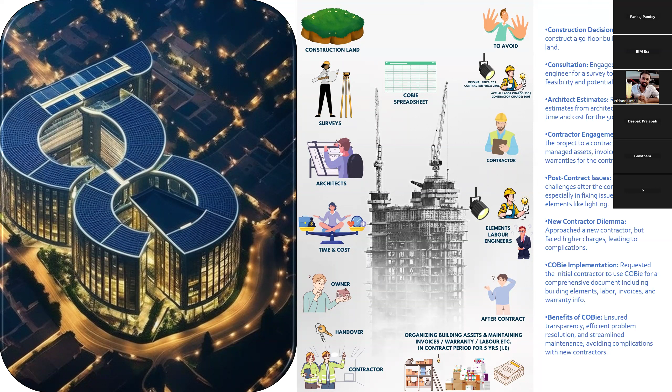What was that? Who is that? Can you please mute? Brother, you must have an option. Why is not Pankaj there? Yeah, Pankaj, yeah. Oh, who is that? It was Pankaj. Okay, I think it's okay now. Hmm, Pankaj. Okay, cool. No, I have an option for you to do that. Thank you.

Okay, so actually we are getting some sort of inquiries on working for COBie projects. So actually we are looking for a team. They are looking for a team. So who can help us with some sort of freelancing kind of stuff.

We generally conduct this kind of COBie training once in a quarter, around every three months, or sometimes it's not regular. The training which we generally take is Dynamo, API and C# regarding creation. So it's purely a BIM, I mean BIM Era is an automation company. So not only that, we are upskilling every BIM person into different sectors. We do train on COBie project, which is really helpful for every BIM person. At the same time, AR is just going to be a boom in coming days.

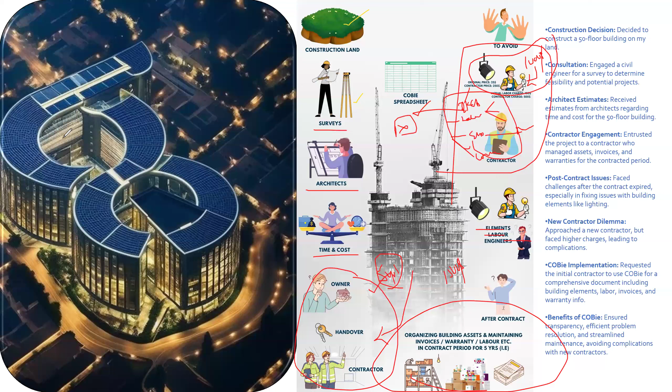So is this concept clear? Is this concept clear, everyone? Is this concept clear so far? Come on, you can text in the chat box.

Is this concept clear? Okay, good.

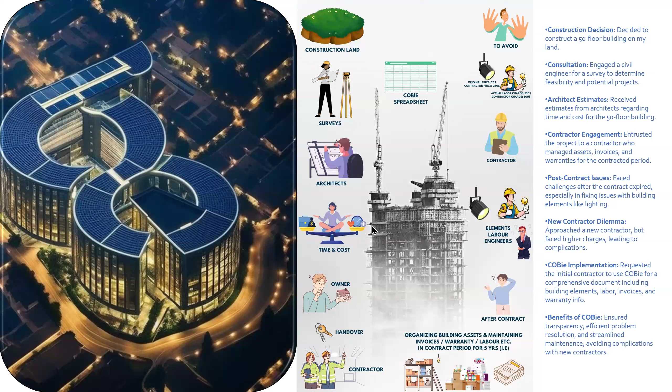So now when it comes to practical implementation, there are two things here. One is BIM and the second is non-BIM. First is BIM and second is non. So what is BIM and non-BIM?

BIM information, actually, when we model or design or build in 3D, the information will be pulled from Revit itself. That's called BIM.

And what do you mean by non-BIM? For example, when I purchase a transformer, they'll just give me a manual with warranty information, insurance information, and every single detail when I purchase this. There's a 5 year contract, maybe 5 years maintenance. So if something goes wrong, I don't want to pay additional. So every piece of information will be stored somewhere from a document.

It's purely data entry work. There's a dedicated team hired for this. That's the reason it's purely data entry. If you check freelancer.com, upwork.com, fiverr.com, you'll find people who work as data entry operators. They'll give some documents and give you a task to fill. Non-BIM data is purely from the documents.

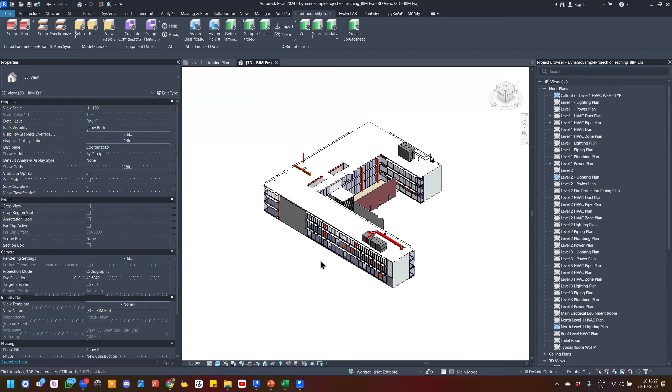You can't pull this information from the Revit model. For example, when I click on a lighting fixture here, I don't have any information in my model at all. I don't see anything like who is the manufacturer. I can't extract it from the model either, because to extract it I'd have to pull from the parameter and export into a schedule in Excel. But I don't have such information here.

So now the non-BIM process comes in. I'll open that particular lighting fixture. What is this? This is a pendant light. So I'll go through all the documents for pendant lights, and using the manual I'll pick it out and say okay, this is from manufacturer IKEA, and the model number is something like PL01, some random number.

And where can I buy this? You shouldn't fill it in on your own, it's from IKEA, IKEA.com, it will be there somewhere in the manual. So you have to fill it manually as IKEA.com, under devices, some random URL actually, like devices/lights/blah blah blah. So this URL information again.

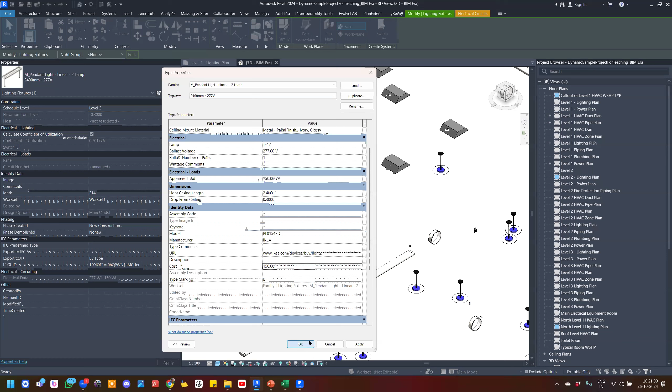So type mark, every single piece of information - but we don't fill all this information in the Revit element parameters, no. Then where do you fill it? I don't want to fill this here, okay, I just fill it here.

So can I export this into a COBie spreadsheet? No, no, okay, you can't - it will not be exported into a COBie spreadsheet.

But actually, how does a COBie spreadsheet really look like? Most people don't know how it actually looks. Let me show you a sample.

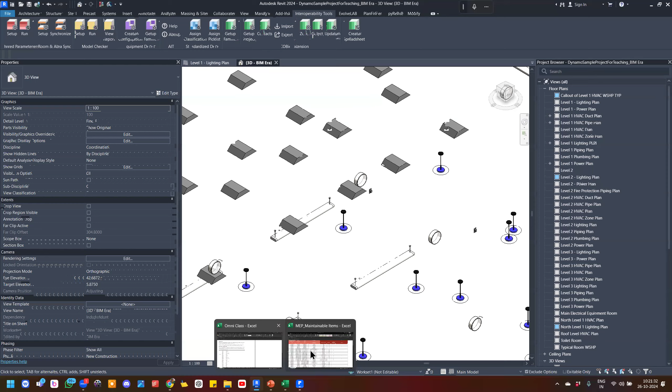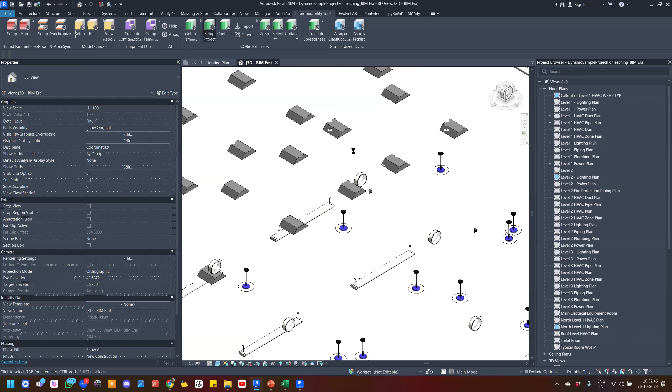Now in the COBie extension we have an option called setup project. You don't have this unless you install that application. So when I go to setup project, now I'm ready to create a project.

There are some tabs - I can set up general stuff related to rooms or spaces information, type information, component information, and system-related information and attributes. I mean parameters, but nothing to confuse - attributes are nothing but parameters. In automation we'd call them variables, here we call them attributes.

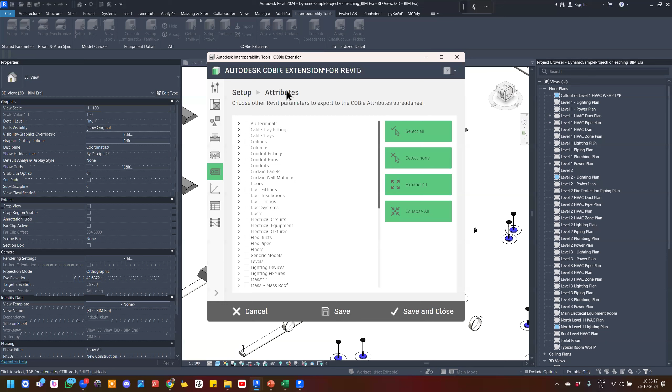So, coordinate points of every single edge, and the schedules. Now the parameter mapping.

If I have some sort of data in a Revit parameter, how do I link it with the COBie parameter? It's mapping, purely mapping - you can see the logo as well. See, you have a mapping from one project to another - these are like Revit parameters and these are like COBie parameters.

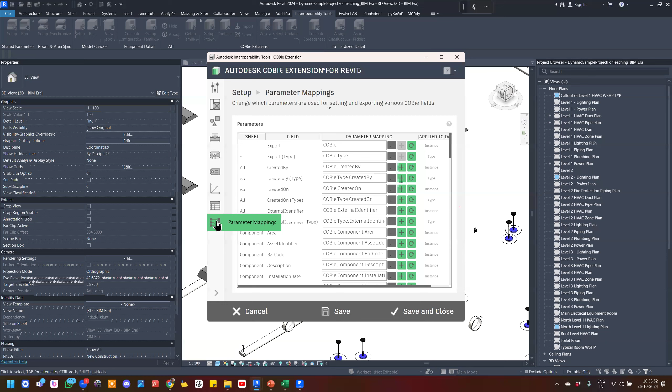So I want this information to be exported into this. This data from here, this data from here. Simple as that. But I don't want to make any changes now since it'll take a lot of time to explain every single tab. So just simply without setting anything, I'll click save and close. Now let it do its work.

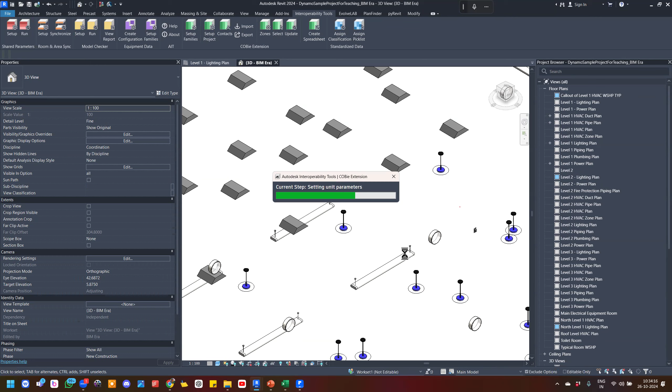And I can see some other sheets which are added in this. In the same plans we have some schedules. This is the COBie component, the COBie component for Windows. These are the schedules which are created by themselves. Let me close it.

So when I click on the same element, I see some additional COBie parameters. You see this now? COBie component area, asset identifier, barcode, description, installation date, when it is installed. So what is the length?

There is no point of adding length here. I mean, say it's 1.2 meters or 1 meter or something, you can indicate here. Component.name, serial number, space where it is exactly, tag number, if you want to add any, if there is any tag assigned to it.

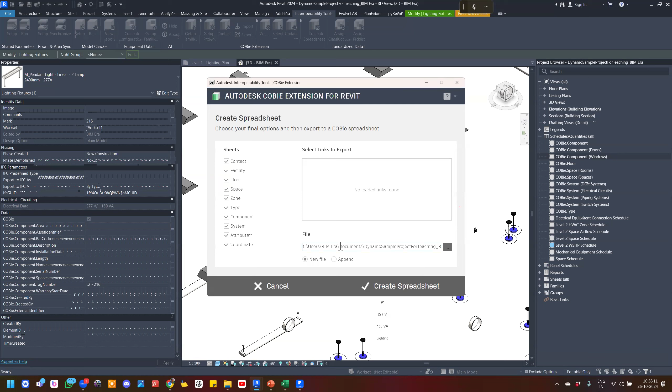So when I'm saying, please create a new file, I'll just say create a spreadsheet. Now it is asking me which one you want me to follow. I'll try UK.

Before this, there is another set of processes. You have to assign classifications and you have to assign a pick list. There's a lot, you'll learn this also during the training. I'll just open file, spreadsheet. There's no need to download any sample.

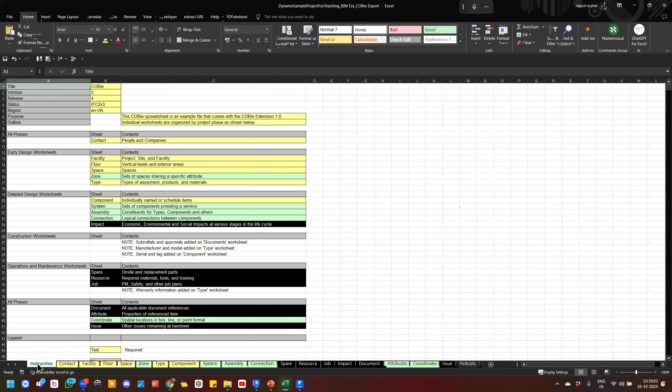Simple, see, in just a minute, in just one click, we created the COBie parameters. In one click, we created the COBie sheet. So now the real headache: how to see the data. See, every column, every sheet, every row is empty, ready to accept the data which you are going to fill. Now the challenge is, what for Rajesh, what is this parameter?

Okay, let me close this. Let's keep this aside.

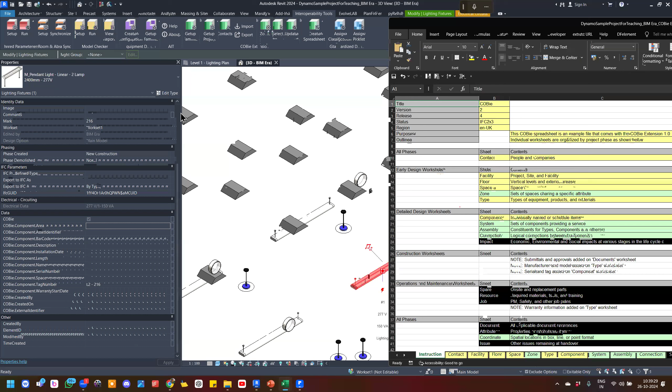Okay, if I fill COBie.component area, it's clearly saying that in the COBie spreadsheet, in this Excel document, there is a component sheet. So it's clearly saying there's a component. Where is it? It's here. Perfect, so now I'm in the component sheet in the area.

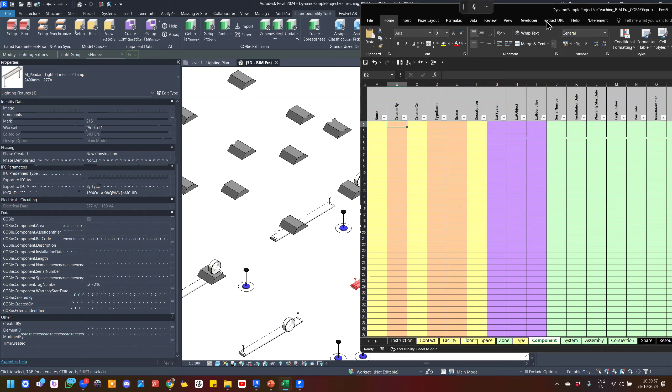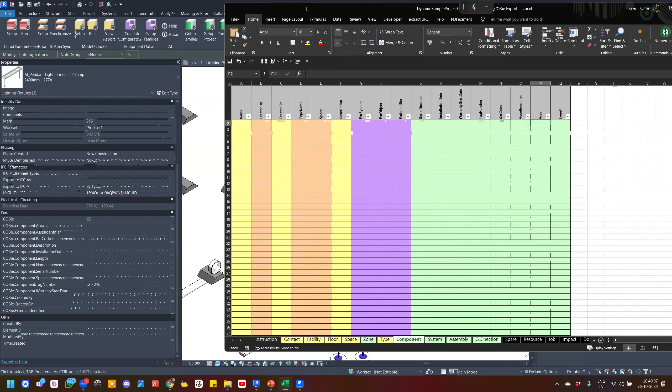I hope this is clear. Is this clear, everyone? Yes. Is this clear, everyone? So what is this? Is this requesting to record their computer? No. Okay, so is this clear?

So it's very simple. Component.asset identifier. In component, where is asset identifier here? If you fill the information here, it will come and sit in this column. Simple. If you are adding more elements, more data - simple, nothing else. It's very simple.

COBie component is fine. So COBie created by - what is this created by? I'll just go and check. Created by - COBie created by, so this is an orange color. As my previous statement, orange color columns don't need to be filled by yourself, it will automatically take in. So how will it take it in - it will take it from the contact sheet.

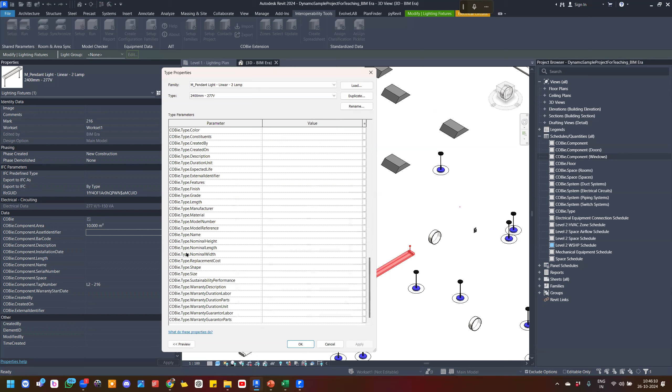I see the component here. So if I just click on edit type, I see COBie type spread, only type. So I see only component and type. What about the zone? What about the space? What about the floor? They are hidden in some area.

You have to activate those. So once you activate it, you can see, for example, manage tab, it brought information. We don't know some parameters were there. So coded facility, so facility sheet will be here again. So how about the contact?

Where is contact? So to create all this, you have to understand the complete extension from scratch till the end. So when I just click on the Setup Project, it will ask me to follow some standards.

If you're in the UK, so I set UK. And what is the units? I follow like foot, so area in square foot and volume cubic feet, and currency, it's USD. Okay, or else like I'll say AUD, something, whatever.

Okay, USD. I mean if you're looking for India, INR. So what do you want me to follow exactly? With element ID, GUID, or mapped parameter. So what is this identification?

So from the Excel, the modeler can get the direct information out there, by showing the sample project which involved before.

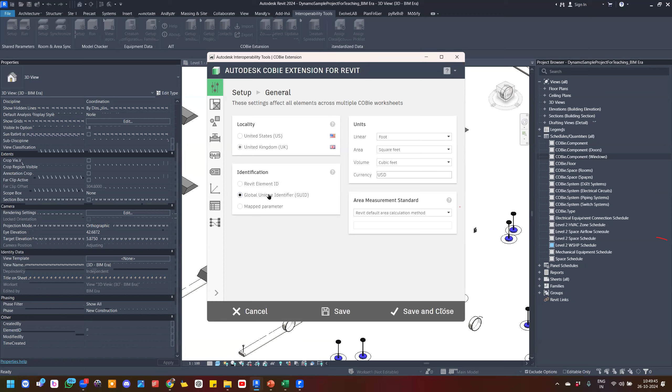So we have some set of standards we did for how we copy. If this is a default GUID, but instead of this external identifier, I'm a BIM user, so obviously I need the element ID of this particular electrical equipment, panel board, which is in level one. So I copy the element ID.

I copy this element ID for Excel and I use manage, select by ID. I'll find the element, it's very simple. But why is this a GUID? If an IFC application should talk to another IFC application, they don't follow element IDs, they follow the GUIDs. So this purple color data, these are actually talking to a different application.

IFC to IFC, this is IFC building element proxy. So this is a GUID which can directly talk to another application.

So in the COBie spreadsheet, if you're going to play with 7D facility management, under 7D or in the facility management, there must be a column, there must be some information. So it's clearly written what kind of area measurement standards to be used. So this is a BIM manager's role, to enter whether the company follows these COBie standards or not. Still, the BIM manager has to mention it in the BEP.

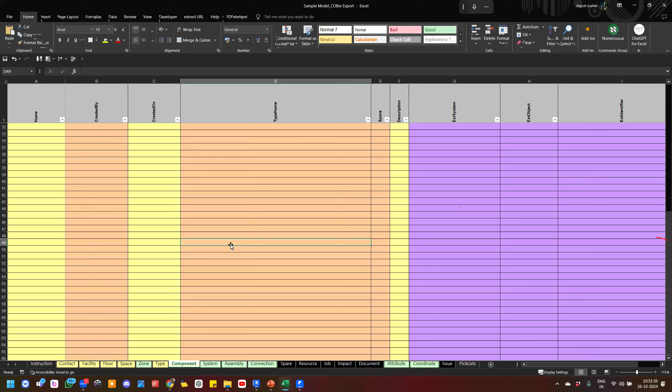For example, what is the motto behind why should I follow all this? Uniqueness. For example, there is an element in a different level and in a different zone, in a different building. I have three buildings.

Okay let's say tower, I have a different tower. Okay, in the tower, in the zone, in a different level. Okay, in a different area like room or whatever. So the number of it. Now if you separate all this for an object, I have light.

I have a lighting fixture here. So which tower is it? If I have five towers, tower four, you shouldn't type like tower four here, you shouldn't type tower four here. Let me show you how it actually works with the help of ChatGPT. Okay, this is something crazy, but stay.

I'll ask... I have created some for this. Okay, act as a COBie expert.

COBie expert. Can you please create a three digit code for the below standards? Just a minute, let me wait for some time. Sorry, I have some throat issue. Okay, so below standards, I'll mention everything here.

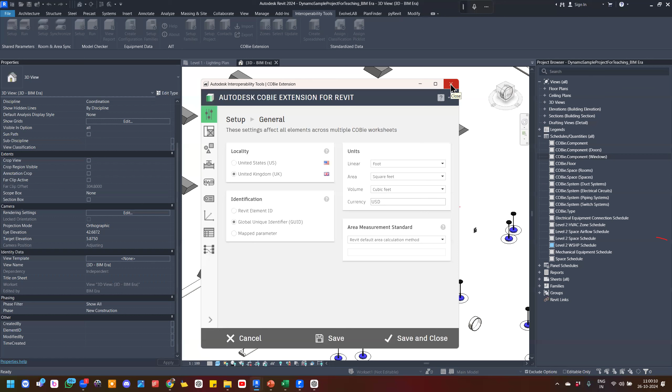Okay, so you can use that - there are some automation tools you can use, like Dynamo. You can use the spreadsheet, get this information from here, and copy paste into the Revit elements. That is possible with the help of Dynamo, but not within COBie itself. Okay cool, so I hope you guys understand what COBie is and everything.

In our training, we are going to learn how you maintain spaces. If you pick a room here, it returns a different result. Space gives you a different result, like assemblies. So what do you want me to follow? I'm an architect working on an architecture model. So should I set all the objects for room, for spaces?

If Civil 3D supports the COBie extension, yes, you can do it.

A space not created means, while doing this, then you have to create a space. If there is no such space created, it won't take it - it's purely pulling the information which it has. If there is no such information, it's very hard to fill. So you have to create the spaces and then try again. Is this clear?

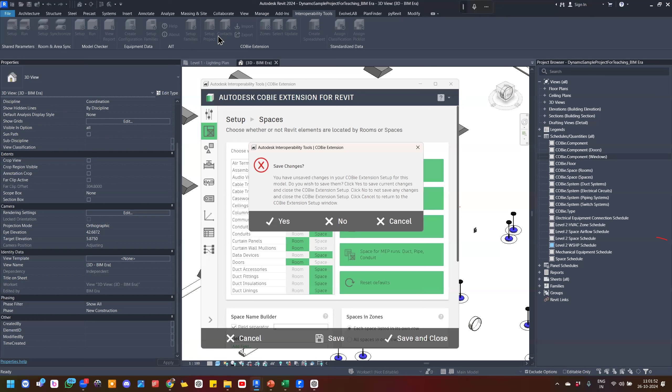For that, we have a set of families. If there are any families, from day one you want to play with the COBie parameters. So you can use this option to add the COBie parameters to the families, and then you can load into it.

Most companies are not doing it because this generally happens mostly in the as-built stage. When you're working in the modeling part, parallelly, no one will fill it - there will be a lot of confusion. So in most cases, you are going to work on a COBie project on the as-built model. No worries, you don't need to bother about this.

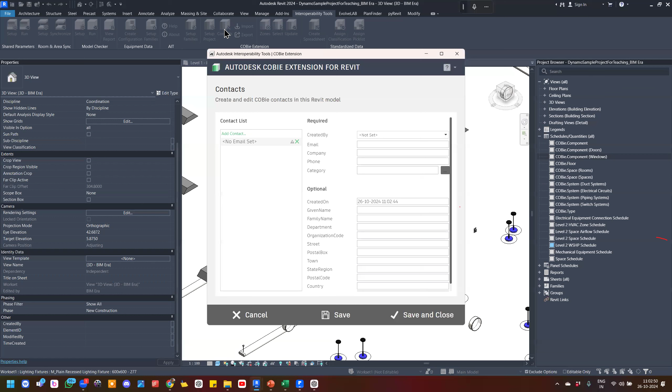And the contacts - who are the owners, who are the leads. If you're an engineer, an architect, a director, or a labor, every person's information will be stored here. If you store it, it will be in the spreadsheet somewhere.

So if you create zones, it will create as zones. Like, no, I don't want to preview a generation for this model - I can say something here. Let it create, it'll take 10 to 15 seconds.

In a building, you have to specify very clearly how many zones you have - it can't do it by itself. So you have to take this information from a manager or coordinator: how many zones we have, what are the zone names, and the area of each. So if this is A zone, this is B zone, and this is C zone, you have to specify it clearly.

How will COBie work on a consultant model? After the consultant, we generally go to the contractor where we work on it. In the consultant model, meaning it's in the early stage, if the client is expecting it in the early stage, it's the same process. There is no two different process for consultant and contractor - it's the same process we generally follow.

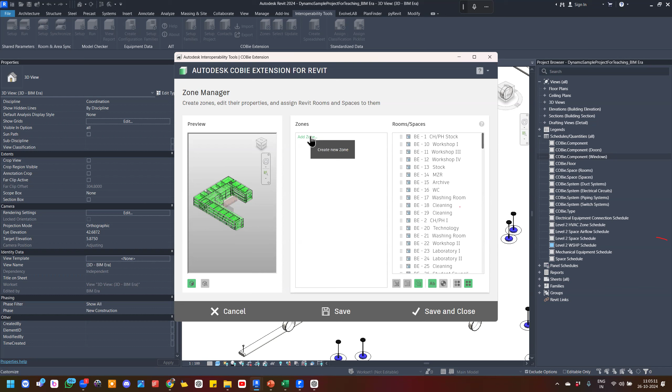Good. If no zone is available in the model, you have to create the zones, Amir. That's what I'm telling you - you have to create a zone. That is the reason you have zones. You have to create a zone.

Assign classification - again, this is very important before you start a project. When I just click on Assign, we don't have anything. See, we're about to finish the COBie, we're done with everything, so this is the last option. It's asking, the database is not loaded. Can you please, if you want me to load, I say yes.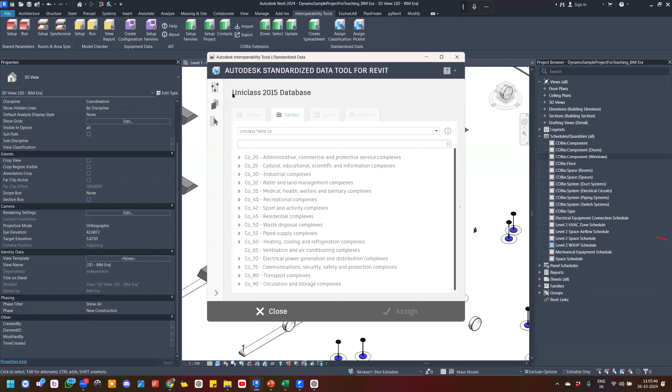Click here to load - now it is taking UniClass. My last project which I worked on, it is a UniClass. But if I want to go with the OmniClass, click here to load.

Omni class. Okay, so what are the standards we have?

If I wish to go with the Omni class, I'll click Omni. If the client is asking for Uni class, just click that. Then see, if you see the icon, Omni class turn it off, Uni class turn it off, Uni format and master format. It keeps on changing, the icons will keep on changing. So the information will be given by the client.

If the client doesn't have any instruction, I do suggest you go with the Omni class in the early stage. It will be very clear and easy to understand because there is nothing different between Uniclass, Omniclass and master format. It's the same, but we have to see our convenience until you have become expert in our tool, you have to follow the easiest process.

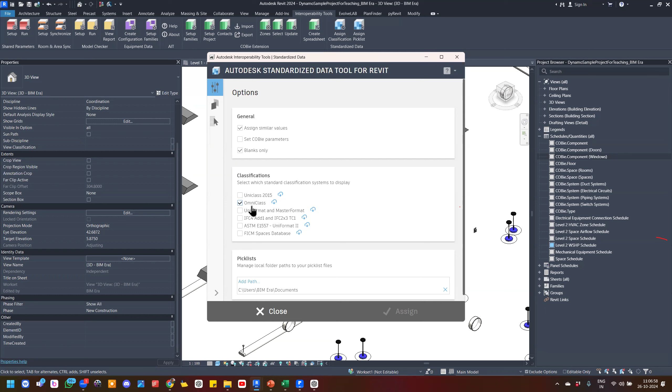So I will not explain Uniclass, which makes it hard to understand. I'll follow Omniclass. Even if you select any electric shop, when you just click on anything, the default is Omni class. See, these are default. Why do they follow Omni class as default? Why not Uni class? Because Omni class is very easy to understand, very clear, very clearly written and has more detailed insights than Uni class.

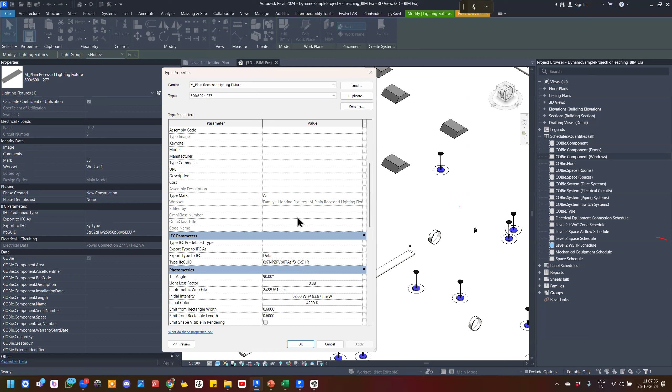So our training will go with Omni class. If the client is expecting Uni class, you already have a bit of knowledge from Omni class, and you can easily adapt the same to Uni class. Simple, I'll just take a 1 hour session on how to migrate from Omni to Uni. Not a problem, not a big deal.

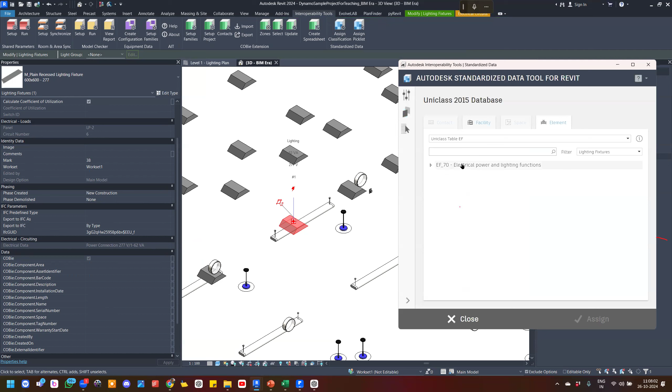Okay, so when I follow interoperability to assign classification, I have to assign it very clearly. So when I pick the lighting fixture, see, you have selected a lighting fixture. Oh is it? If I pick electrical equipment, just pick electrical equipment.

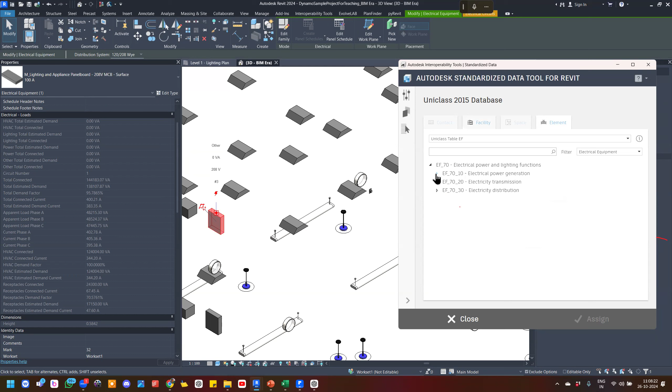See, it's clearly saying electrical equipment, and it shows what kind of electrical equipment this is. Oh, so this is an electricity distribution, a low voltage electricity distribution. I'll just simply assign.

Now the value is assigned, is it? Let's go and check in edit type. So I can see in the classification, EF 70 30 45, EF 70 30 45, and the value low voltage electricity distribution have been filled in. That's it, you are not going to enter a value on your own. It will pull the information directly from Revit. This is what you're going to do.

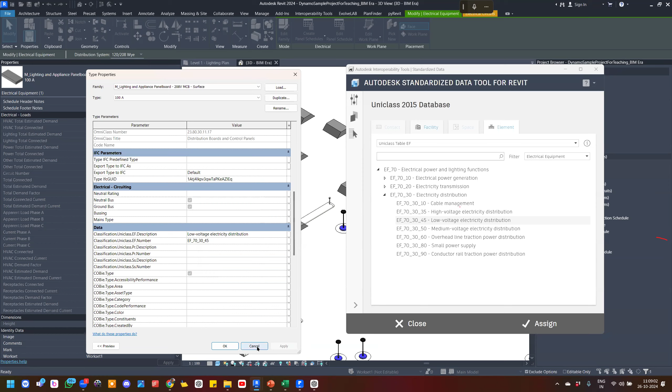Let me cancel it. So the EF table, okay. What about the PR? What is EF? What is PR? What is SS? I'll explain in the training.

Okay, so now I'll go to the PR. This is not a communication product, this is services, mechanical and electrical service control indicator, all this control panel. It's a control panel. So if it is a panel board, do you have anything like a panel board? Okay panel, I'll just simply assign it. It's designed, so control panels. Just go and check again for this object. So control panels, PR 7550, done.

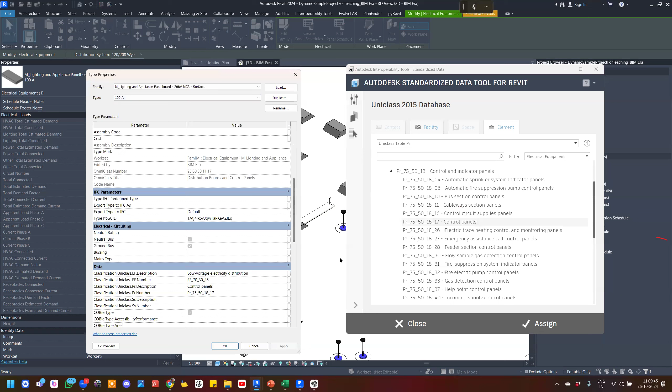I'm with another, so I'll do the systems now. SS, so this is going to be again, okay, electrical systems, SS70, electrical power generation system, distribution system. So again it's a low voltage system and a low voltage distribution system. Okay fine, I'll simply assign.

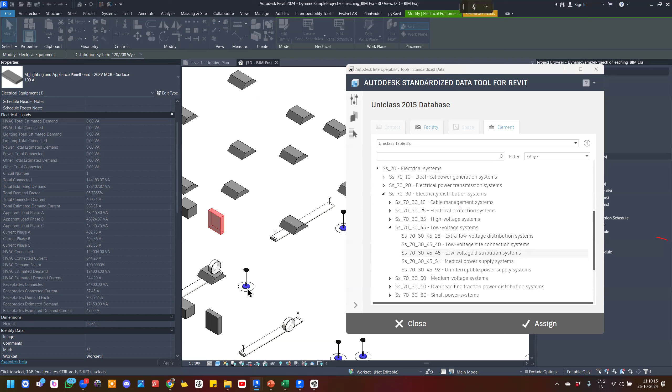Assigned, just click on edit type. I see two filled. Okay, if I fill this, can I see it on the other equipment? Can I see it on another equipment? Just click on edit type. I don't see the data because this one is 480 volts GB and this is 208.

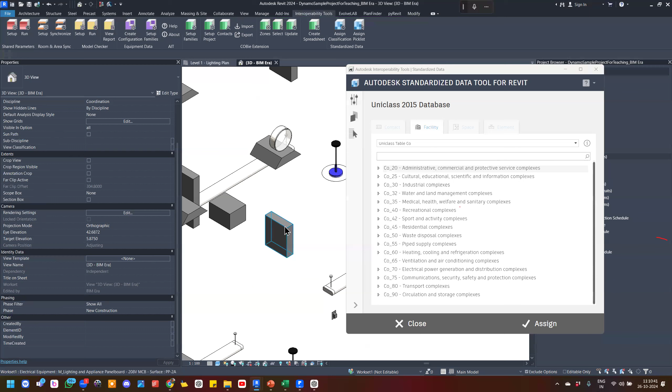Select all in the entire project. So I have one more. When I pick here, just click on edit type, I see the same information in it. So you don't need to fill all this again, you don't need to fill all this again.

Okay now Rajesh, I've done everything, right? So if I export this and create a spreadsheet, can I see this information in the COBie spreadsheet? No, there are some additional things you must follow.

I'll say create spreadsheet, I'll create a spreadsheet. I don't see any information. Again I follow, okay, template. I don't see such information on electrical equipment, even though I assigned something in it.

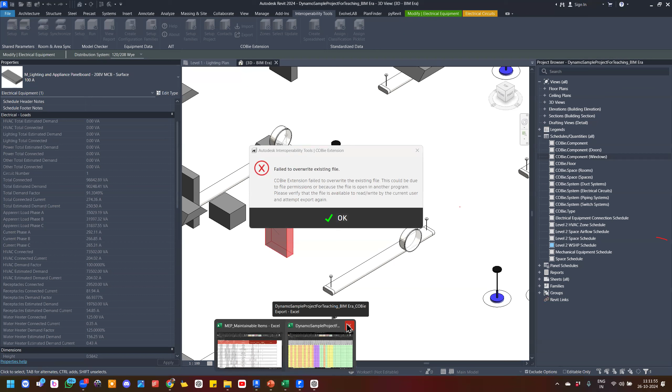No, because see, failed to overwrite existing file. Oh, that opened, let me close it up. It shouldn't be run, don't save. I'm not sure which one is that. I'll just close, or don't I close? Don't save. Don't save, I'll just okay.

Let me create a spreadsheet again. Create a spreadsheet.

There is a problem with COBie.facility.name - it's actually a warning. If you are my Dynamo student before, you'll come to know the different warnings in the LMS. In the components, I didn't see any single thing - in the classification, system, assembly, connection zone, facility, floor, space - I didn't see any single information. So there is another process to follow.

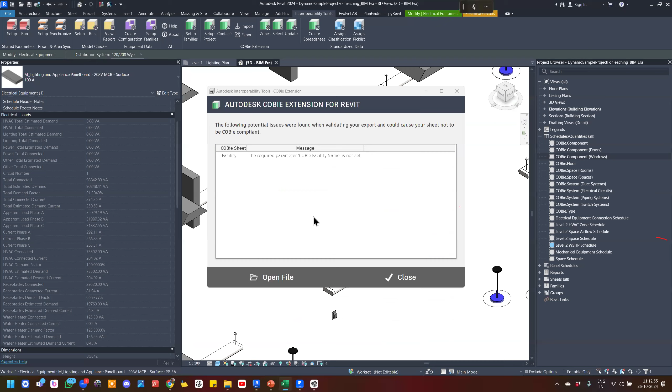Don't worry, all this will be covered in the training. We generally don't maintain the same source for all the objects for maintainable items. So I'll share you Excel documents which show what is actually maintainable and what kind of elements you're supposed to work with. Based on that, you will be working on it simply.

So anyone have any questions? I'm done with today's workshop. I hope I haven't made you feel bored and didn't waste your time. I think this was a productive workshop for you, or do you feel bored? Come on, if you have any questions.

How many parameters can we fill by interoperability tools automatically? Everything - if you have a parameter which is listed in the COBie, you can fill all the parameters as well. But the client doesn't need all. You just have to pull some information only - whatever information the client actually needs, you just have to fill that. There's no need to take it all.

We generally charge the client on an information basis. So if there is information you're supposed to add, you need to calculate how long it's going to take to fill. You're not going to play with just one object, one type - you will create a type schedule and check how many types you have in the model. Then figure out how many hours it will take for a single type to fill the complete information. For example, if you have 50 mechanical types and each type takes 2 hours, that's 2 hours times 50, so 100 hours - just for mechanical equipment. That's what you're going to plan.